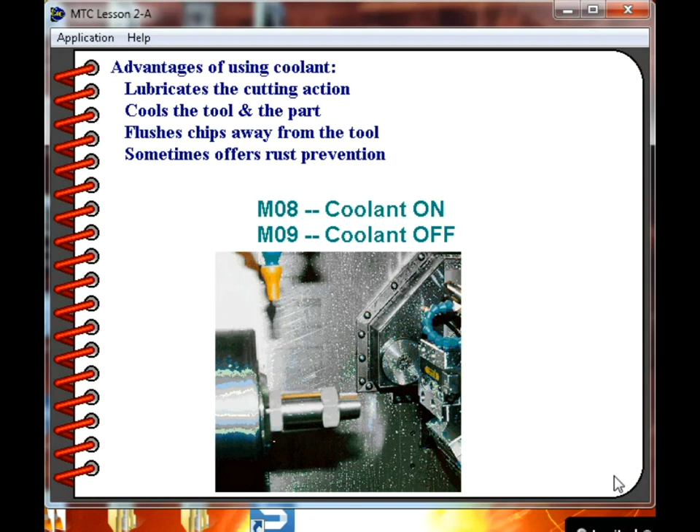To turn the spindle on is quite simple. M03 turns the spindle on in forward rotation. M04 turns the spindle on in reverse rotation. M05 stops the spindle in either case.

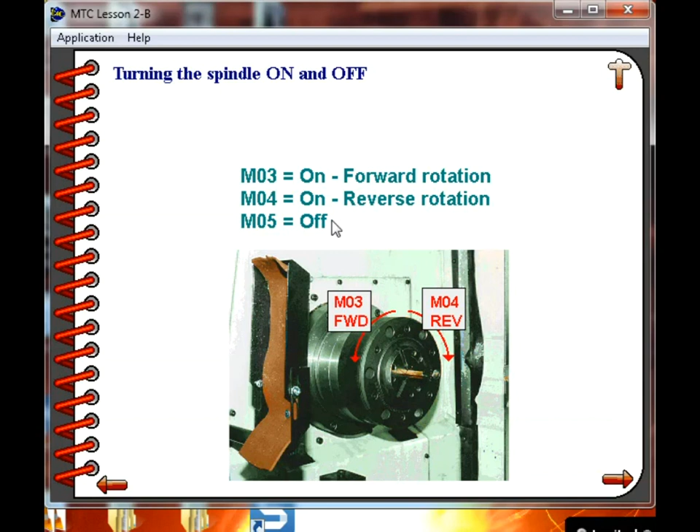Controlling the speed of the spindle is a little bit more complicated than just simply turning the spindle on or off. On a CNC turning center, we have two different ways of controlling the spindle's speed: constant surface speed and direct RPM programming. Constant surface speed takes into account that as the tool is cutting different diameters, the RPM of the spindle needs to change.

This has to do with the change in the diameter of the workpiece. As you can watch during this animation, the tool starts out cutting at a 1/2 inch diameter, but by the time it's toward the end of the workpiece and at the end of the finished path, it is cutting a 1.2 inch diameter. Now, at the 1.2 inch diameter, our circumference of the workpiece is much greater than it is at the 1/2 inch diameter.

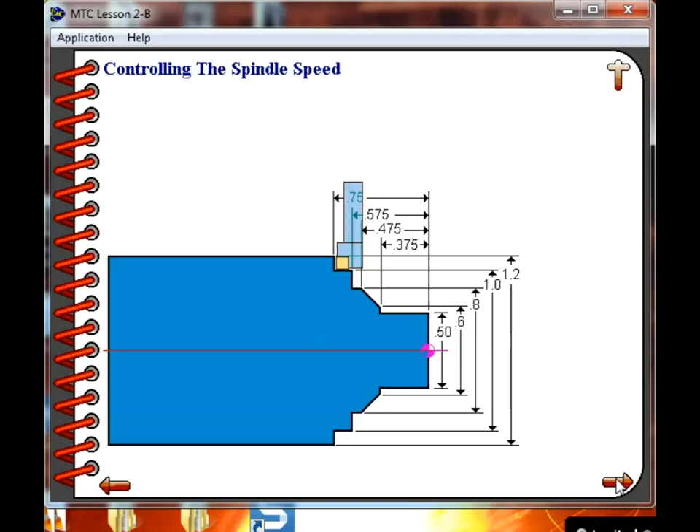Constant surface speed deals with the circumference of the workpiece. The circumference of the workpiece is considered the surface area of the part. Calculating the circumference is really quite simple. There's a formula: circumference equals diameter times 3.14. That is just short for a constant called pi.

In our example, our tool starts out at a 1/2 inch diameter, which has a circumference of 1.57 inches. The 1.2 diameter has a circumference of 3.768 inches. It can then be said that the 1.2 diameter has an approximately 2.5 times greater surface than the 1/2 inch diameter. Therefore, if the RPM remained constant, the speed of the material going past the tool would be 2.5 times greater at the 1.2 diameter than it would be at the 1/2 inch diameter.

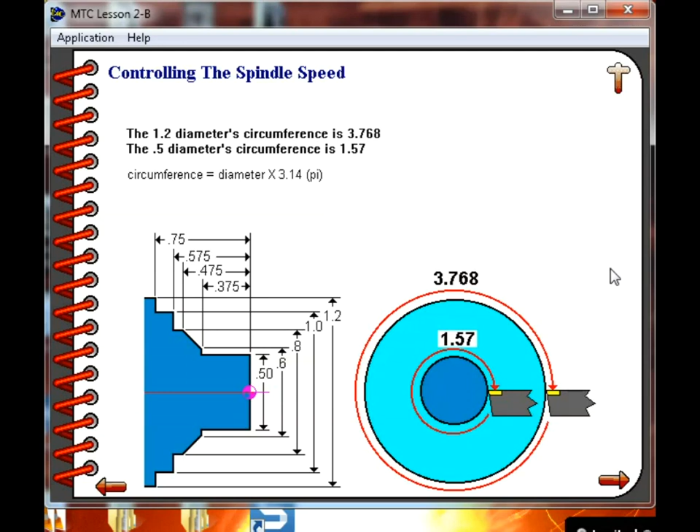In order to counteract this, what we need to do is alter the RPM depending on the diameter that we're cutting.

Here is another very graphic example of how cutting at different diameters affects the cutting speed. In this example, we are showing a facing cut on a relatively large part, starting out at a 12-inch diameter and facing down to the center. Now let's assume that the RPM will remain at a constant 100 RPM during this facing cut. At the 12-inch diameter, the cutting speed relative to the tool would be 314 surface feet per minute.

As the tool faces down towards the center line, it will eventually cross the 1-inch diameter. At the 1-inch diameter, the relative cutting speed would be 26 surface feet per minute. As you can see, the cutting speed, the surface feet per minute, is much lower the smaller in diameter that we get. To counter this, what we really need to do is increase the RPM as the diameter gets smaller.

This will keep our relative cutting speed very constant. The feature, constant surface speed, does this automatically for us. With this feature, we would command G96 and tell the machine what surface feet per minute we want the machine to run at. Then the machine will go through and calculate an RPM for every diameter that the tool is cutting at. So under the effect of constant surface speed, the RPM of the machine is constantly changing whenever the x-axis changes diameter.

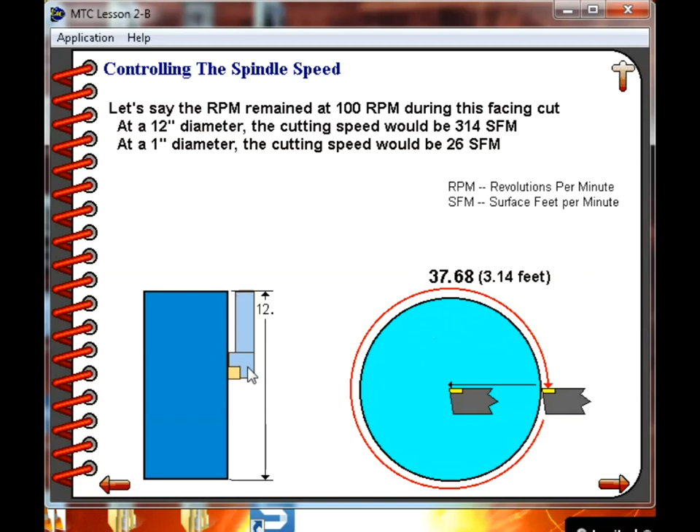Deciding on when to program the machine in either constant surface speed mode, G96, or in revolutions per minute mode, G97, is sometimes confusing for the beginning programmer. Generally speaking, you would use G96 whenever the tool will be cutting at different diameters, as in facing, turning, boring, and grooving operations. You would select G97 when performing single point threading, tapping, drilling, and reaming. Generally, you use direct RPM programming, G97, whenever you are cutting at a constant diameter.

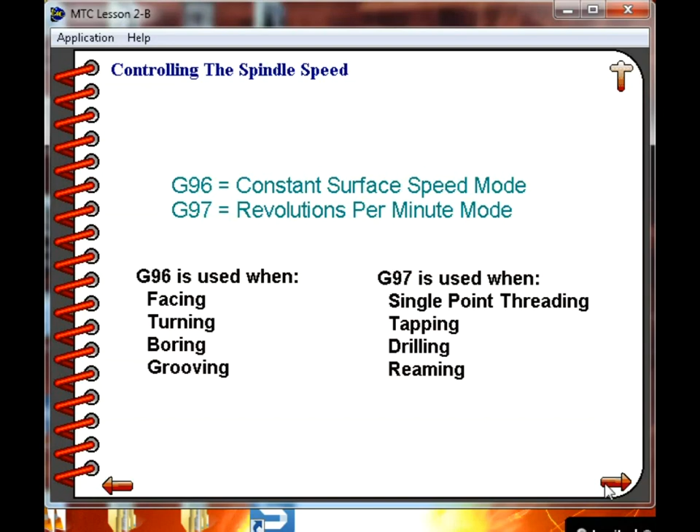Selecting the proper speeds and feeds is always a challenge to any programmer. You have to refer to some form of documentation that outlines the specifications for cutting speeds and feeds relative to the workpiece material you are cutting and the tooling material. Oftentimes this documentation comes from the tooling manufacturers.

We have a sample spreadsheet up on the screen right now that shows cutting speeds and feeds for turning, boring, and facing operations with coated carbide. Along the left side of the spreadsheet, you'll see the workpiece materials. In this example, we're looking at 303 stainless steel. Following that to the right, the next column is our machining operation, whether roughing or finishing. The next column shows our depth of cut, which we'll get into more later.

The next column, labeled SFM for surface feet per minute, is in the range of 300 to 650 SFM. That's a very large range, but keep in mind that 303 stainless steel can come in many different hardnesses, which is why tooling manufacturers often recommend a working range. You have to tune that to your specific workpiece material. In our case, we'll pick a number in the middle of that range. Taking 300 plus 650 and dividing by 2, we get the exact middle at 475 SFM.

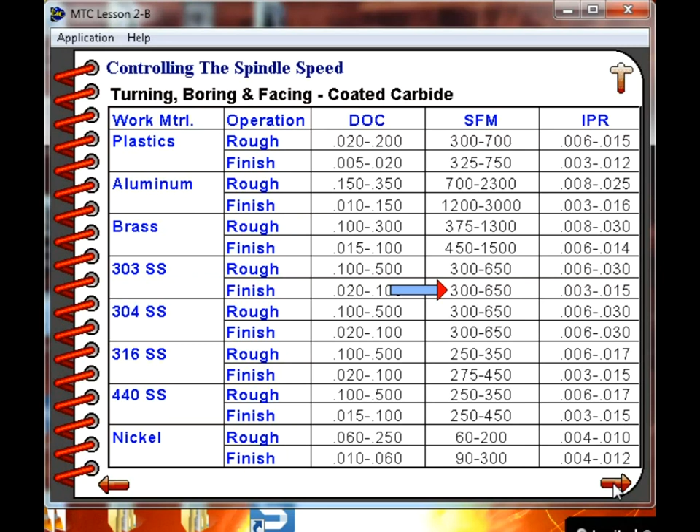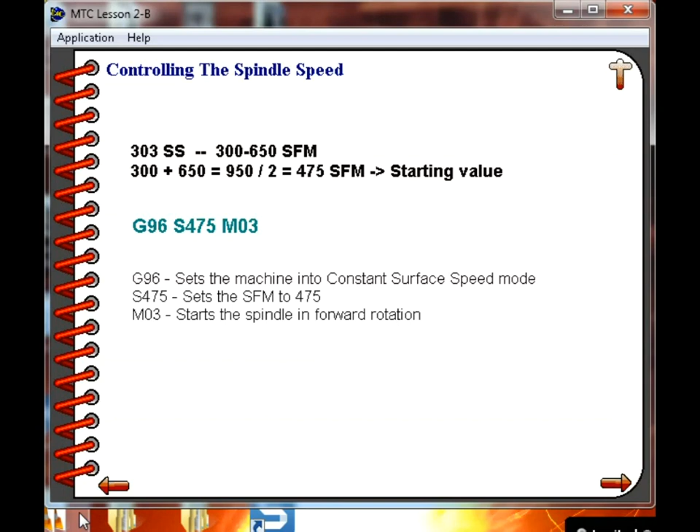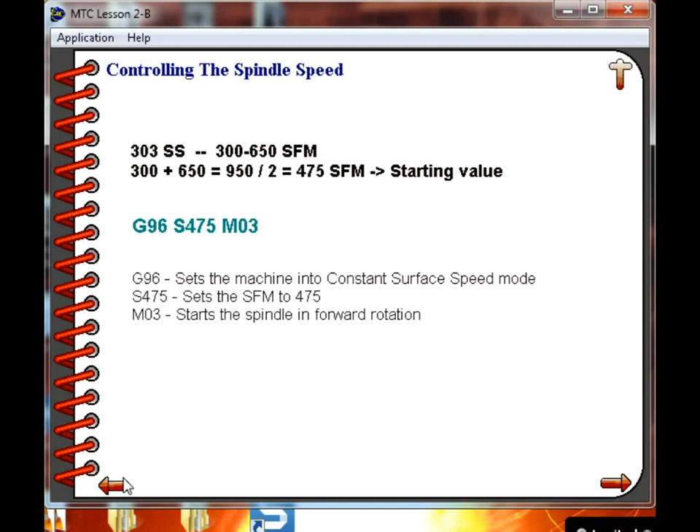To review, for 303 stainless steel, the chart gave us a range of 300 to 650 surface feet per minute. We took 300 and added 650, which gave us 950. We divide that by 2, and that gives us 475 SFM, right in the middle of our working range. We'll use that as our starting value.

Programming the machine to run in constant surface speed is very easy. We would command G96 S475 M03. G96 sets the machine into constant surface speed mode. The S475 was our SFM that we just got from that worksheet. The M03 starts the spindle in forward rotation.

It should be noted that we can only have one M code per line. This is a limitation built into most of the older equipment. Machines older than about 1995 could only have one M code per line. Some newer machines allow up to 5 M codes per line of program code.

As far as the S word goes, it really doesn't make any logical sense to have two S codes on one line. It would be very contradictory to have an S475 and also, for example, an S300. The machine just could not figure out which speed to run at.

As mentioned earlier, when we are drilling, tapping, reaming, and single point threading, we need to program the spindle in direct RPM as opposed to constant surface speed. For drilling, tapping, and reaming, this is especially important because our tool will be moved to X0, meaning a 0 diameter. If we are under the effect of constant surface speed while drilling, the spindle would be rotating as fast as it can possibly go because it's cutting at a 0 diameter, or a very small diameter. That would cause constant surface speed to accelerate the spindle to maximum RPM. This is undesirable, as you can obviously tell.

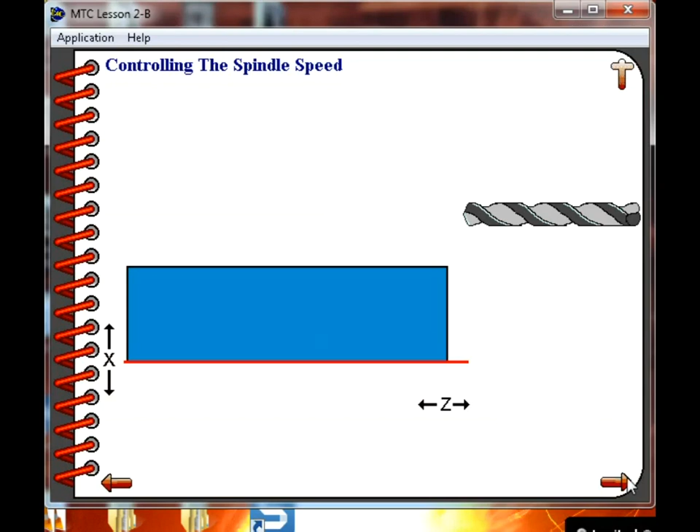In order to calculate the RPM for this tool, we need to know what diameter the drill is. For this example, we will use a 3/8 inch diameter drill. From the previous slide, we determined that when drilling in 303 stainless steel, we should be cutting at a speed of 100 surface feet per minute.

Using the formula 3.82 times the SFM divided by the diameter gives us the RPM. The 3.82 in the formula is a constant, very similar to the numeric constant pi. However, 3.82 also takes into account the conversion from inch into feet. Our drill diameter is given in inches, 3/8 of an inch, but our surface feet per minute unit of measure is in feet, so the 3.82 takes into account this conversion.

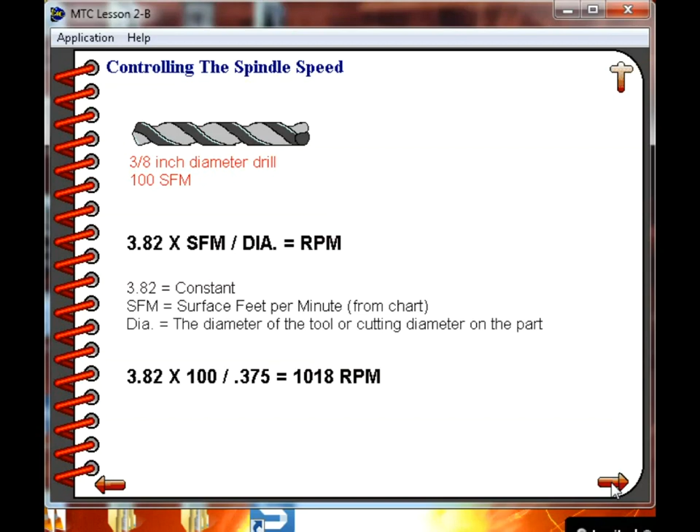Turning the spindle on in direct RPM mode is very easy. We would command G97 S1018 M03. The G97 sets the machine into revolutions per minute mode. The S1018 tells the machine to run at our 1018 RPM that we calculated, and the M03 turns the spindle on in forward rotation. That's all there is to turning the spindle on under the effect of direct RPM programming.

Let's do one more exercise. First, we will go through and calculate the RPM for a half-inch reamer. For this example, we'll say that this half-inch reamer needs to be cutting at 45 SFM. Using the formula, RPM equals 3.82 times the SFM divided by the diameter, we put our real numbers into that formula: 3.82 times 45, take that amount, divide it by 0.5, and that gives us 343 RPM. Now that is what we would put in our program.

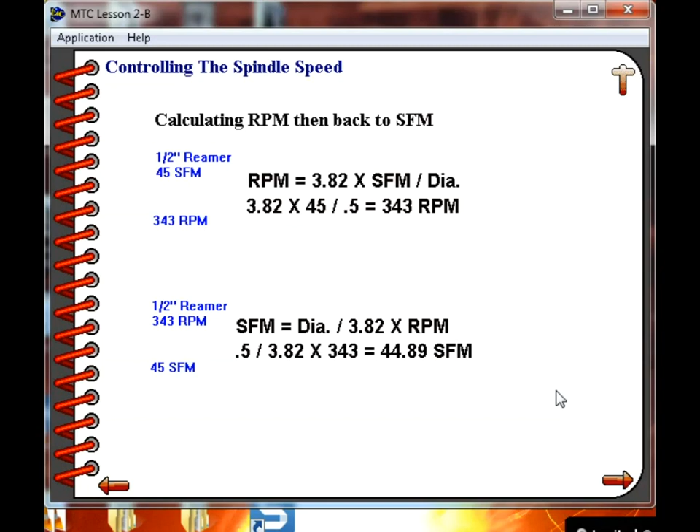Let's take a look at how we can call up the tools and work with those offsets. Most CNC turning centers utilize a turret for mounting the tools. A turret is a large disc with a means of fastening the tools to this disc. The turret rotates clockwise and counterclockwise.

The machine itself will decide which is the fastest way to get the tool into the cutting position, so it will automatically determine whether it should rotate clockwise or counterclockwise. On some machines, they allow you to program which rotation you would like to use. Oftentimes this is done using a special M code.

Care must be taken when mounting the tools onto the turret. You need to provide adequate clearance between each of the tools. This is especially important when we have OD tools next to ID tools.

As a programmer, you need to be aware of the limitations of each machine that you'll write a program for. With these limitations in mind, you will select the proper station to place the tool.

It should also be noted that a typical mistake most beginning programmers make is to select tool numbers based on their order of usage. For example, if their first tool is a turning tool, they would call that tool 1. The second tool perhaps is a drill, and they would call that tool 2. And then the third tool might be a boring bar, and they would call that tool 3. This is not the correct way to do it.

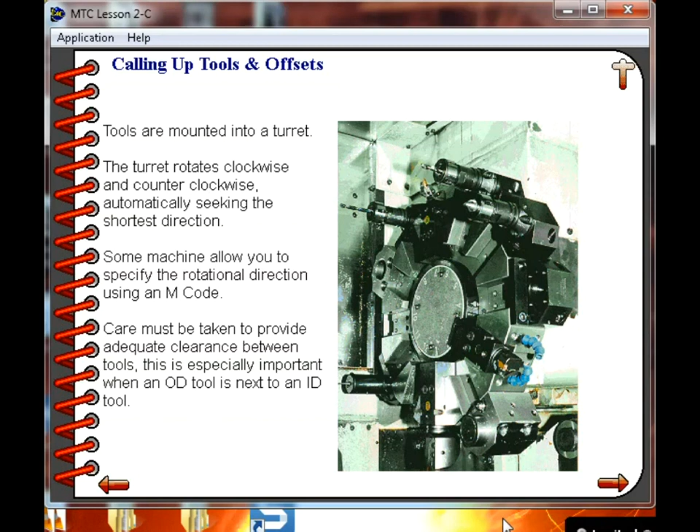Programming the machine to call up a tool is really quite simple. We are going to use the T code to call up a tool. However, the T code calls up two things. In this example, we have...

T0101. The first two digits, 01, call up the tool. The second two digits, 01, call up an offset. We'll discuss offsets in a few minutes.

It is important to understand that we can call up tool 1 with a different offset. For example, T0131. That calls up tool 1, offset 31. At first glance, this may seem a little bit odd or unusual. However, calling up a tool with a different offset number is quite frequent.

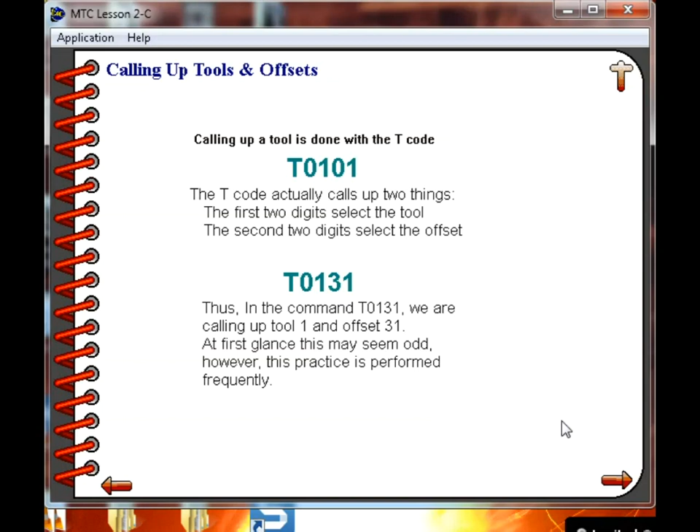We really should take a look at formatting of the word. The T code must use 4 digits. This is why we would program T0101 instead of T11. This is required because of the double purpose of the T code and how the machine would read that command. The machine is expecting to see a T word followed by a 4-digit number.

The machine knows that the first 2 digits will be the tool number and that the second 2 digits will be the offset number. You will find that there are many codes that require a specific number of digits. Oftentimes you will only need to add a leading 0 to the numeric value. If you remember back, for coolant, the command was M08.

Well, the actual value is only 8, but on older machines we needed to have those 2-digit numbers, so that forced us to have M08. It is very important to know that when you have to format a number to a specific number of digits, we have to add the 0 at the beginning of the number. Otherwise, if you add the 0 at the end of the number, it's like multiplying it by 10.

For example, to get from T1 to a T01, if we screw up and put the 0 at the end of the number, we would have T10. That would mean a whole different ballgame. So watch out for certain words that require an exact number of digits. The T code is the most critical.

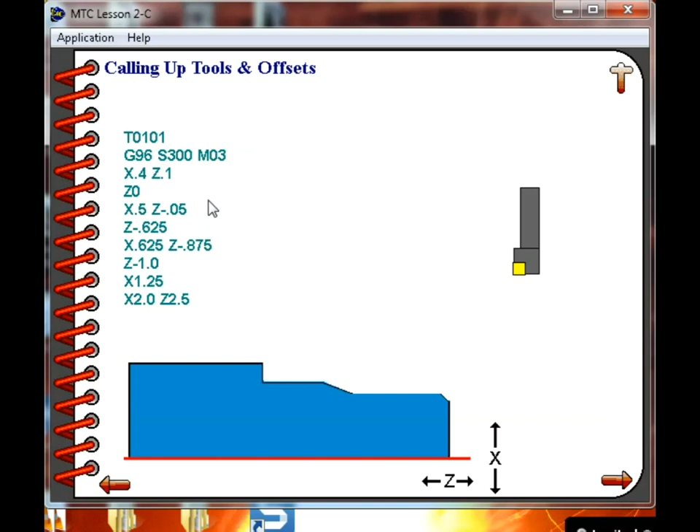There are several different types of offsets on the machine tool. For now, we will focus on wear offsets. If you can imagine, as the tool is cutting a series of workpieces, the tool would begin to wear. As the tool wears, it is cutting less material, and with each successive part, the tool will wear a little bit more. Now, the setup person or the operator needs to be able to adjust the machine to take into account this tool wear. This is needed so that we can maintain accurate size of the workpiece.

If we did not have offsets, we would literally have to either adjust the tool the way we did on older automatic mechanical equipment, or we would have to reprogram the entire job taking into account this tool wear. Either way, it's a very time-consuming process.

The wear offset allows us to input a value shifting the tool by a certain amount. For example, if our tool had worn 1/10 of a thousandth, our workpiece would become 2/10 of a thousandth larger in diameter. When we go to offset this tool, we simply need to tell the machine how much smaller in diameter we would want to make the part. In this example, we would want to make the part 2/10 smaller, so we would put in an incremental offset of 2/10 of a thousandth.

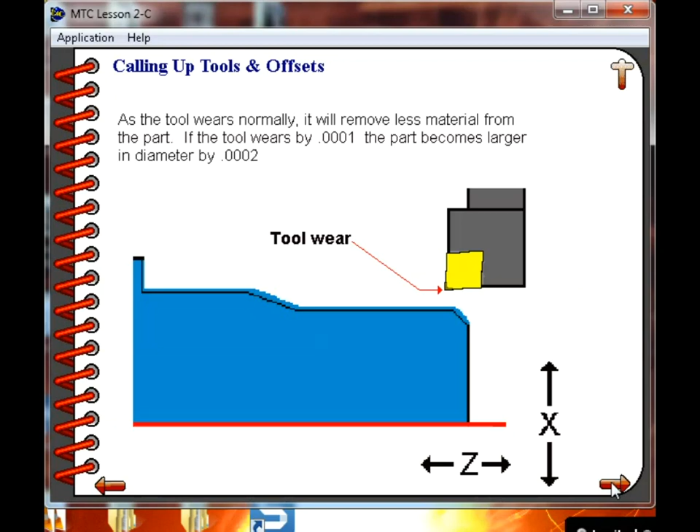Let's take a look at how all of this fits together from a programmer's point of view and from an operator's point of view. On the machine tool, there is a special place where an operator would put offsets. Now, these offset values shift the position of the tool all the while the tool offset is active. In our little program at the left of the screen, that offset number 1, called up by the T0101 command, remains active during the entire cutting operation.

Now, if we look at the T0101 command, we see that we're using offset 1. If we look over at the screen from the machine tool showing the offset wear page, we see that offset number 1 has an X value of 10 thousandths and a Z value of 2 thousandths. That means that every X position within the program will be shifted 10 thousandths in the plus direction on the X-axis, and every Z movement will be shifted 2 thousandths in the Z plus direction. Again, tool 1, offset 1, remains active during the entire cutting operation.

At the next tool, if we were calling up tool 2 using the command T0202, we would activate offset number 2, which would then shift all of the coordinates for that tool minus 2 thousandths on the X-axis, with no shift at all on the Z-axis. This gives the operator tremendous control in maintaining the size of the workpiece. Again, an offset value could literally be as small as 1/10 of a thousandth. That gives you great control over the precision of a workpiece.

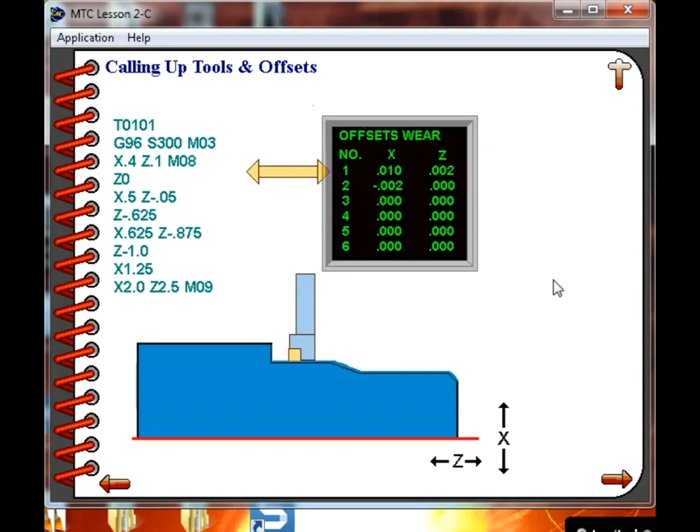Depending on the machine type and how it is set up from the factory, your control may automatically cancel tool offsets. You have to determine first if the machine automatically cancels the tool offsets. If it doesn't, you will have to do this through your program, and that is accomplished quite simply by just programming.

T0100, as in this example. T01 calling up tool 1 again, and 00 at the end of it calling up offset 0, which basically cancels any offset.

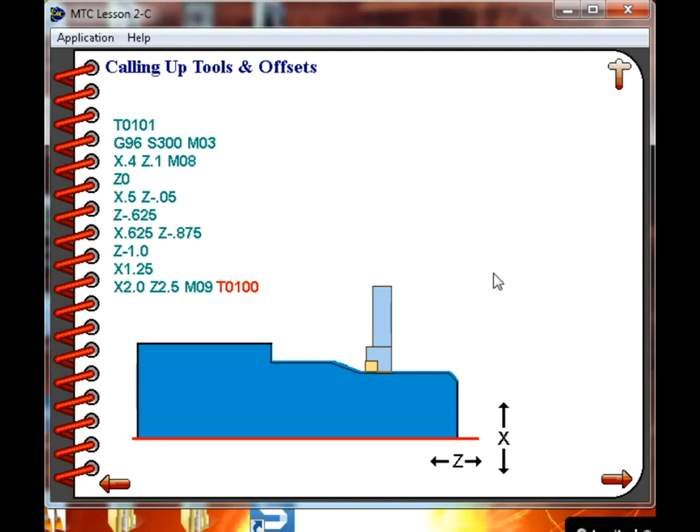So again, to cancel an offset, you would call up the same tool, but specifying offset number 00. So far we have only looked at the wear offsets. There are basically 3 types of offsets: wear offsets, geometry offsets, and work shift offsets. Both geometry offsets and work shift offsets really relate to the setup person. Those offsets will be covered in the setup lessons.

Let's take a moment and review what we've covered in this entire lesson. M08 turns the coolant on. M09, coolant off. M03 turns the spindle on in forward rotation.

M04 turns the spindle on in reverse rotation. M05 turns the spindle off. G96 and G97 both select a mode for the spindle speed.

G96 selects constant surface speed mode, and if you remember, we use that type of spindle control when we are turning, boring, facing, and grooving. G97 selects revolutions per minute mode, and we use that mostly for drilling, tapping, reaming, and single point threading.

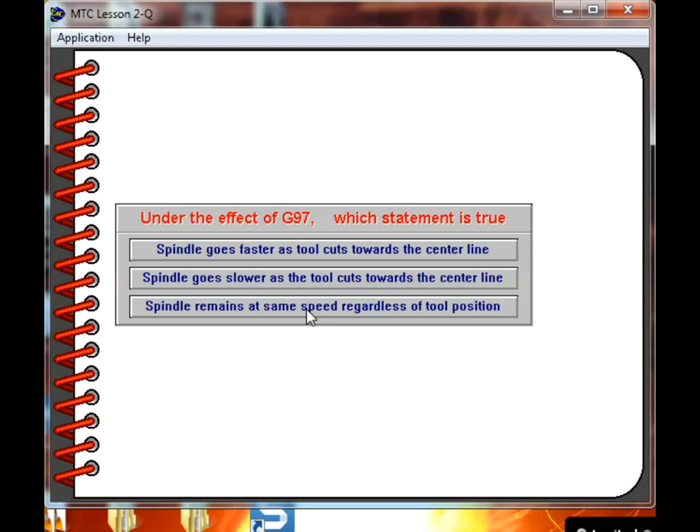Under the effect of G97, which of the following statements would be true? When the program is run, it is executed in which order?